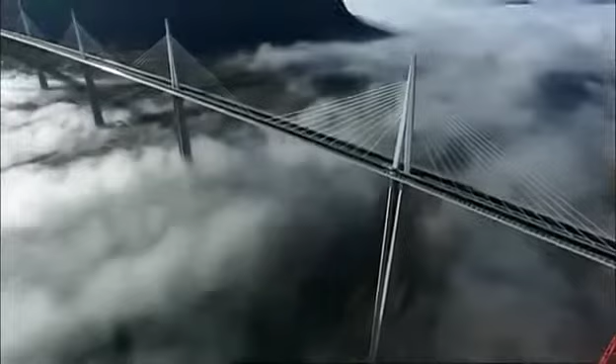This is the Millau Viaduct, the tallest bridge in the world. Its highest tower stretches a staggering 343 meters, so high the bridge glides above the clouds.

But this is a megastructure they said couldn't be built. When I've shown first the drawing of this bridge, they really thought I was crazy.

The team attempting to build this amazing freeway in the sky had to survive landslides, fight winds gusting at 130 kilometers an hour, and weather massive storms as the bridge simply hung in the balance. It's a bridge that pushes the boundaries of engineering to the limits, and then beyond.

Imagine building a series of Eiffel Towers, then slinging a 4-lane highway between them, all the way across one of the deepest valleys in France. Impossible though it sounds, that pretty much describes the building of the Millau Viaduct.

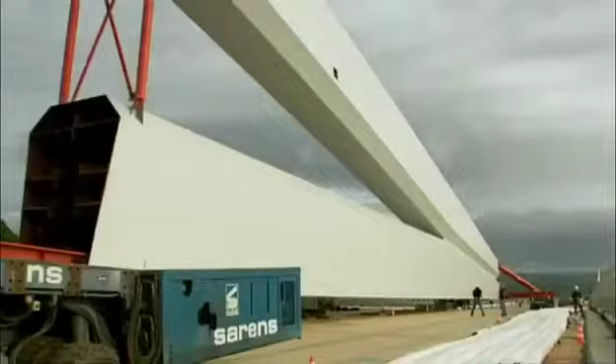From the start, the construction team faced 3 daunting challenges. First, build the tallest bridge piers in the world. Second, put a 36,000-ton freeway on top of them. And third, erect 7 steel pylons, each weighing 700 tons.

And what's more, they had to do this hundreds of meters above solid ground. So high that if you were on top of the Eiffel Tower, you'd still be looking up at this awesome bridge.

October 2001, the team break ground. They're required to build a bridge that'll last for 120 years. And to win the contract, the teams promised to build it in record time, less than 4 years.

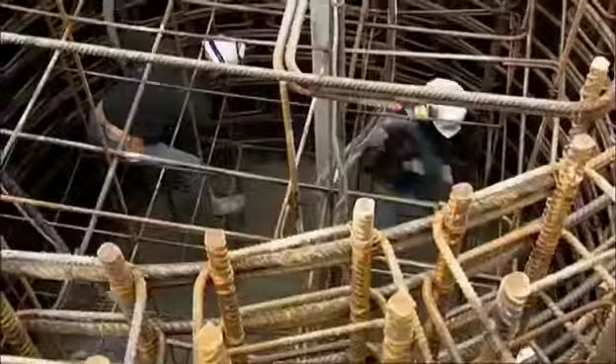By comparison, the world's longest suspension bridge, the Akashi Kaikyo in Japan, took a full 10 years to build. To up the ante, any delay will cost them $30,000 a day in penalties.

There are 7 piers that are numbered from the northern end of the valley. Number 1 will pose problems because of the steep slope. Number 2 will be the biggest challenge since it's the tallest. Crossing the river, number 3 is not much shorter. Then 4, 5, 6, and 7 climb the gentler slope to the south.

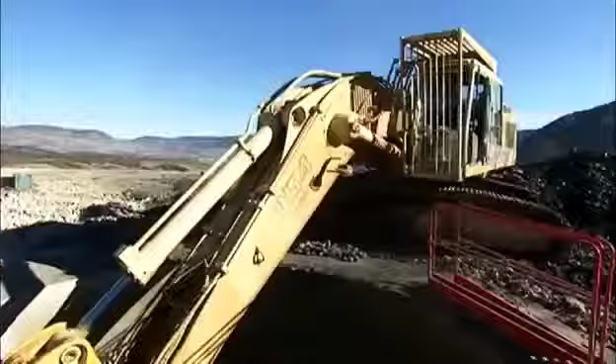To begin, the team had to bury the foundations deep in the bedrock in order to support the enormous weight the bridge will place on them. But the forces of nature were stacked against them.

Geologists have warned of the risks posed by the region's fractured limestone. The rock is full of cavities that are essential to the local cheese economy. These cave systems, close to Millau, are home to a unique bacteria responsible for the blue mold in the world-famous Roquefort cheese. But what's perfect for cheese could be disastrous for a megastructure.

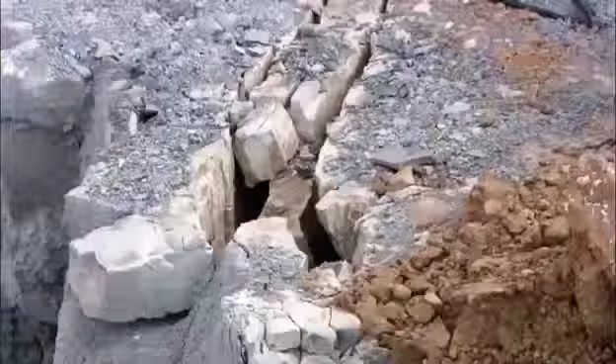The geologist's diagnosis spelt one thing: landslides. This kind of catastrophe could jeopardize the entire project. Despite the warnings, building went ahead as planned.

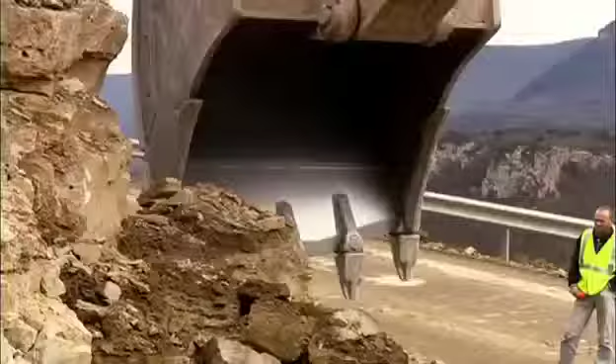Then, well into construction, as predicted, a dramatic storm causes a landslide. 4,000 cubic meters of rock collapse around Pier 1. Fortunately, the fallen rock doesn't damage the pier, but the warning is clear. They're forced to divert precious manpower and equipment to stabilize the slope and prevent a repeat collapse.

So if the area is prone to landslides, why did they build the world's tallest bridge here in the first place? The answer is simple.

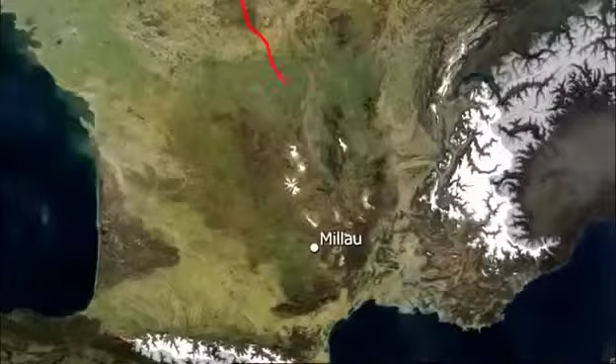In the 1980s, France built a freeway linking Paris directly with Spain. This major artery headed south across the French countryside, while from the Mediterranean, the freeway headed north, until they both hit one of the deepest valleys in France and stopped dead.

Welcome to Millau, France's least favorite bottleneck. The town of Millau is in the mountainous region of the Massif Central, one of the most tranquil parts of France. But in summer, this poor medieval town suffered traffic hell.

The locals couldn't take it anymore. Neither could their mayor. It was terrible for our reputation. When you hear every day on the television and radio, avoid Millau, there's a traffic backup, a 5-hour wait in Millau.

And it's not just the people of Millau. Two drivers, Jamila and Jemima, crossing the 30-odd kilometers between the freeway on either side of Millau, reveal exactly why this bridge is needed. Jamila, in car 33, will cross the new bridge, while in car 22, Jemima will take the old road across the valley floor.

Getting straight on the freeway, car 33 approaches the Millau Bridge after just 18 minutes. The only delay is the 30 seconds it takes to get through the toll booth. Then driving at 100 kilometers an hour over the spectacular bridge, she takes just 32 minutes to get to the other side.

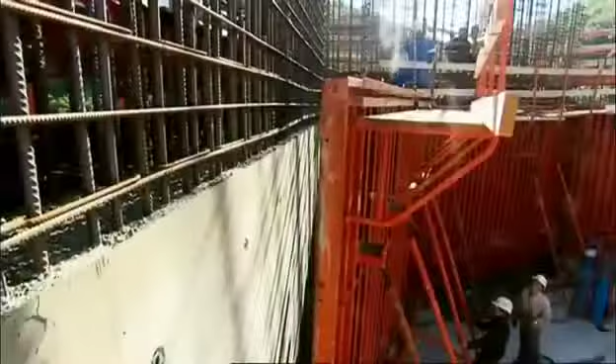The Millau Bridge would not only be the world's tallest, it would be unlike any bridge ever constructed.

When I first showed the drawing of this bridge to the relevant authorities, they really thought I was crazy.

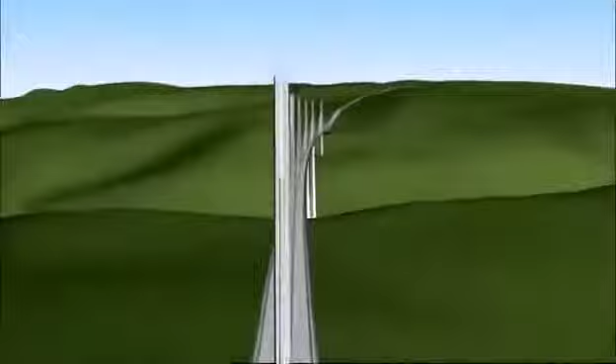Virlogeux's Normandy Bridge has two sets of cables supporting the deck. But he wanted to up the stakes for Millau by losing one row of cables, so the remaining line would be forced to do twice the work. More dramatically, the 2.5-kilometer Millau Bridge, instead of having a single main span, needed a whole series of piers to support it across the valley.

No bridge builders had ever attempted a multiple-span, single-line cable-stay bridge on this scale before. The French authorities had a problem. Nervous about Virlogeux's groundbreaking scheme, they held a competition inviting other engineers and architects to compete with different designs.

The winner, Lord Norman Foster, is one of the world's superstar architects. In Hong Kong, he built the world's largest airport terminal. In Barcelona, offices literally hang from a mast on his communications tower. This is a man who regularly contemplates the impossible and delivers.

You know, it's the challenges, one challenge on top of another, on top of another. And with Millau, one of the biggest challenges was making it fit into the landscape, given it's just down the road from the famous Gorge du Tarn, France's equivalent of the Grand Canyon.

How do you make something which has to be so immensely strong against the forces of nature look very gentle, very delicate? How do you weave something on that scale into the most unbelievable landscape?

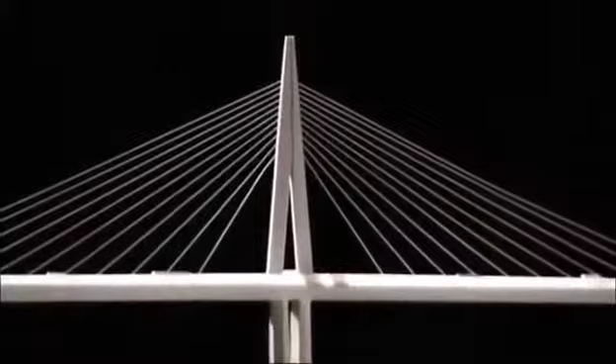Foster wanted the bridge to appear as delicate as a butterfly, but this butterfly has to support the weight of five Eiffel Towers in gale-force winds hundreds of meters above the River Tarn. Getting the design wrong would be a disaster.

Then, with Millau still on the drawing board, Foster's record as a bridge builder suffered a major setback. His Millennium Bridge in London is actually another record-breaking structure, the lowest profile suspension bridge in the world.

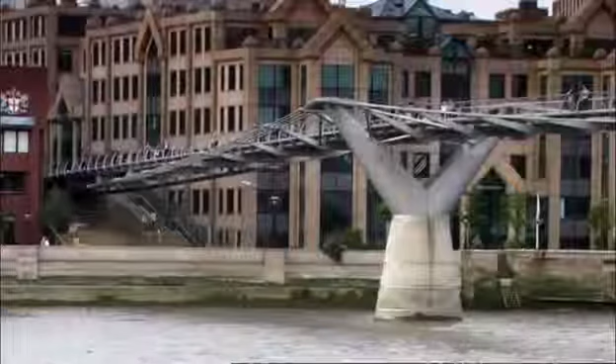But when this footbridge opened to the public in June 2000, it was a public relations disaster. Crowds walking over it set up a resonant frequency, and the bridge began to sway. As people adjusted their step to the small initial wobble, the effect was magnified. Though it didn't threaten the structure, the swinging motion became so dramatic the authorities closed the bridge for a refit that took 1.5 years and ended up costing over $8 million.

It was a bad omen for the Millau Bridge, where construction was soon to begin. And at 15 times the height, a design flaw would be a catastrophe.

December 2001, France's Millau Viaduct, the tallest bridge in the world, is under construction. Everything about this project is supersized. It'll need 200,000 tons of concrete, so much that the team have to build a concrete factory on site. But there's nothing straightforward about this concrete.

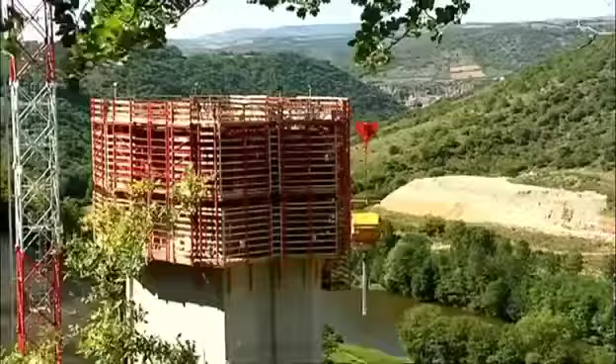The formula must be just right. It needs structural strength to support the massive loads it'll have to bear. But it can't set too quickly, as it has to be hoisted into position and poured hundreds of meters in the air. And it needs to be just the right color to suit Norman Foster's vision.

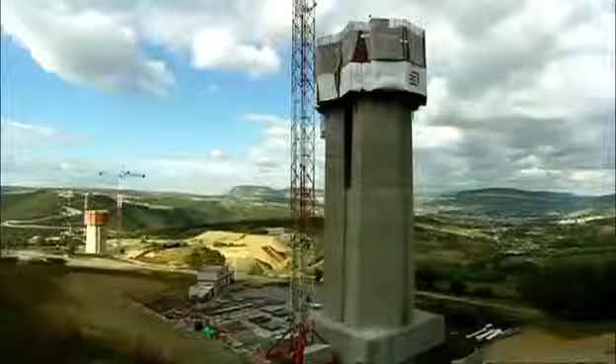In fact, the architect's vision has created a headache for the construction team. He's designed each pier as a complicated geometric shape, tapering the entire way up with vertical grooves set into them to create shadows. But what's just a line on paper for the architect was a major challenge to build.

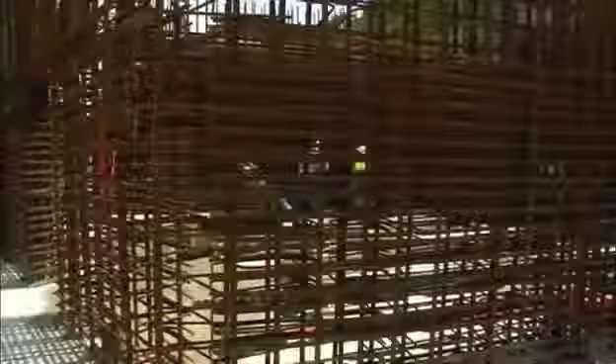The enormous piers are built step by step by pouring concrete into a temporary mold. To give the required strength, the molds are filled with a frame of steel reinforcing bars. In total, 16,000 tons of these steel bars are hoisted into place and secured. Laid end to end, they'd stretch the 4,000 kilometers from Millau all the way to Central Africa.

The shape of each pier is seriously complicated. As a result, each time they remove the sections of red steel shuttering, they have to change the shape of the mold to fit the profile of the next 4-meter section. Manhandling these steel panels, weighing up to 15 tons apiece, is no picnic. And with the combined height of the 7 piers totaling well over 1 kilometer, they have to change the shape of the mold over 250 times.

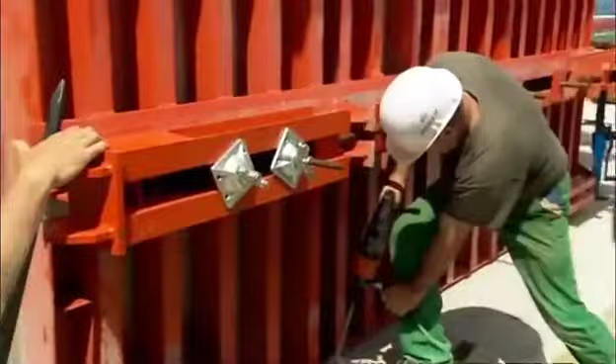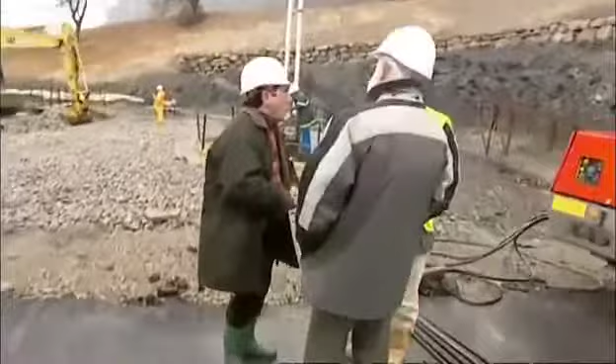Every 3 days, each team on each pier went through this whole cycle, then repeated the process. But it was a race against time, with a permanent threat of delay. Keeping the entire build on time and to budget was the daunting responsibility of one man, Jean-Pierre Martin.

If instead of 3 days we took 4, imagine that multiplied by the number of castings. We'd end up with a 3 or 6 month delay. With a penalty of nearly $1 million a month, this isn't something Martin wanted to contemplate.

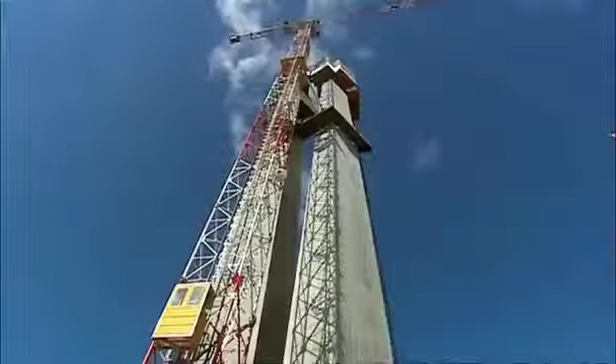And this schedule wasn't his only headache. You have to be pinpoint accurate when you're building the tallest bridge piers in the world. Get it wrong, and the bridge simply won't fit together. Just 10 centimeters out, about a hand's width on each 4-meter section, and the tallest pier could be 6 meters off at the top, the width of a jumbo jet fuselage.

Each team was aiming for a specific point in the sky. For Pier 2, this was exactly 245 meters above the ground, 546 meters from the north side, and 1,914 meters from the southern end. There was no room for error.

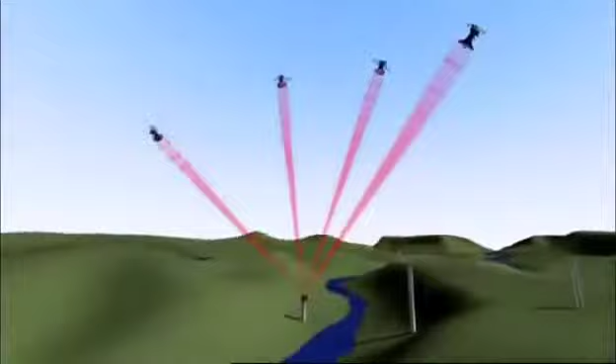The only chance they had to get it right was with GPS, accurate to within 4 millimeters. Using signals from multiple satellites, the team could pinpoint their position and make sure they're on target for that critical point in the sky they needed to hit.

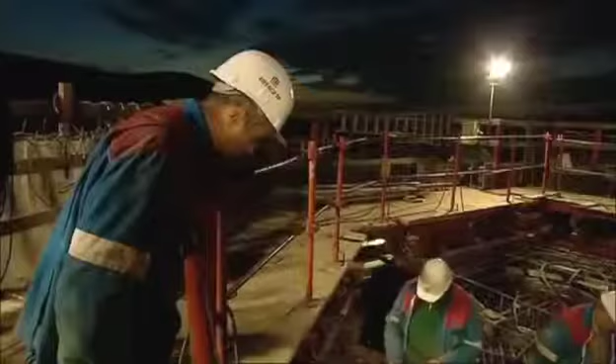Month after month, the piers climbed higher. Finally, by November 2003, they reached their full height. At 245 meters, Pier 2 becomes the highest bridge pier in the world. But is this record-breaking pillar where it's supposed to be? Amazingly, it's dead on target, to within 2 centimeters.

Champagne corks pop. It's time for a major celebration. Against all the odds, they were 1 month ahead of schedule, but the team couldn't afford to relax. The next stage of the project would be the most difficult part of the build.

Phase 2 of building the world's tallest bridge involved putting a 2.5-kilometer roadway weighing 36,000 tons on top of the piers, a full 270 meters above the River Tarn.

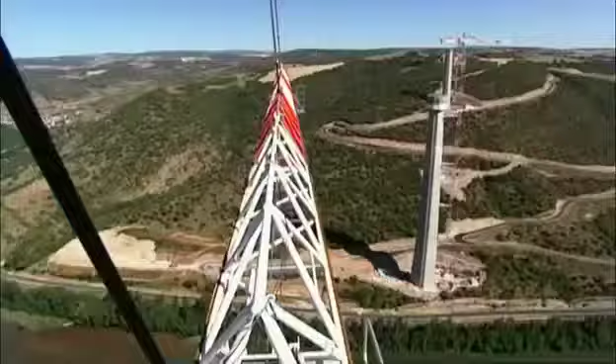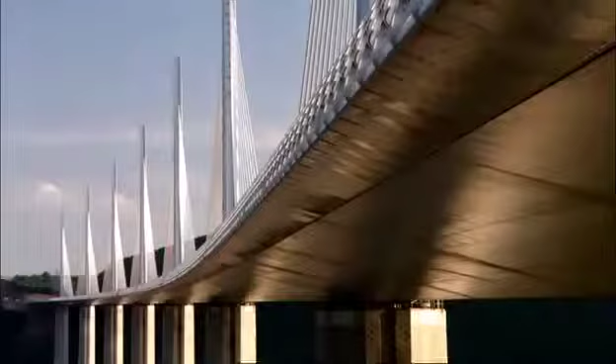With these fatalities in mind, the team decided to fabricate the entire road deck on the safety of solid ground. This meant building it in steel, which in theory would be much safer than lifting vast concrete sections hundreds of meters into position.

There's only one problem with this plan. No one had ever put a road deck on piers anything like this height before, let alone over a 2.5-kilometer span. In the end, only one steel manufacturer had the courage to take on this colossal challenge.

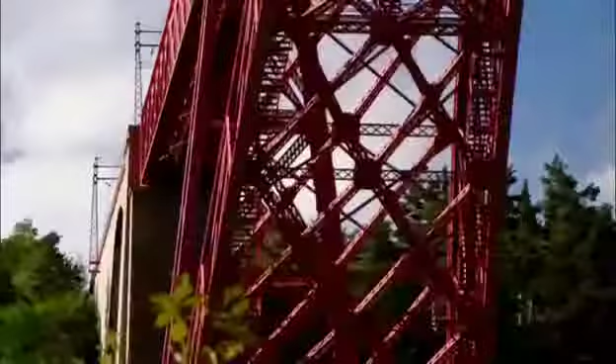Eiffel, the steel firm set up by the great French engineer. Eiffel built what was once the tallest bridge in the world, the Garabit Viaduct in southern France, before getting round to the framing for New York's Statue of Liberty and, of course, his signature tower in Paris.

But despite the company's experience, Eiffel's director, Marc Buonomo, knew he was taking a serious risk. It was a gamble for the company, because if there had been a mistake, if it hadn't worked, it would have been the whole company.

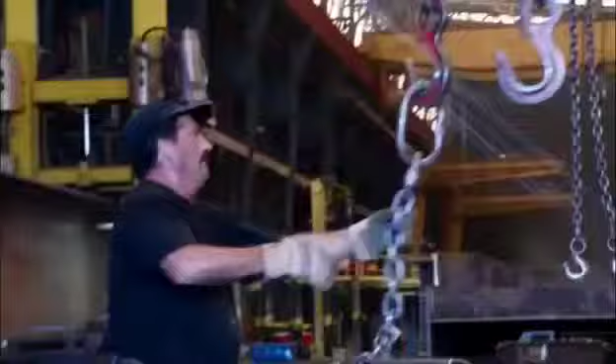They fabricated the massive sections that would make up the road deck in the company's steel factories. This immense jigsaw puzzle involved manufacturing 2,200 separate sections, weighing up to 90 tons, and some of them 22 meters long.

Their accuracy is measured with a laser to within a fraction of a millimeter. The huge square tubes are the central spine that should make the deck rigid. The triangular side panels will be welded on either side to create the width for a 4-lane highway.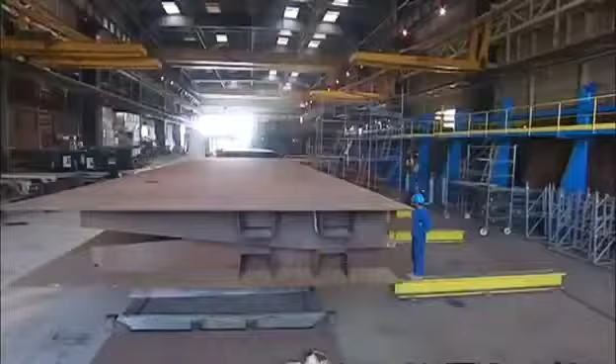To meet the punishing schedule, Buonomo automated the manufacturing with a 2-headed welding robot and a plasma cutting machine. Each cutting pattern or template is programmed into the computer. Then the machine automatically blazes its way through the steel. The torch reaches a scorching 28,000 degrees centigrade, that's 5 times the temperature of the Earth's inner core.

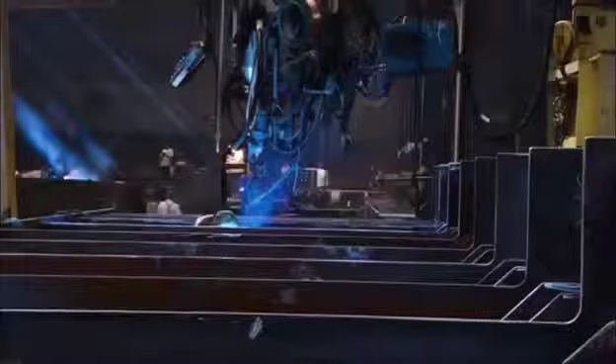But cutting and welding was the easy part. The hard part was getting these monster sections the hundreds of kilometers from the factories to Millau. The routes had to be planned with precision to avoid major damage. The police coordinated safety and clearances.

Even with that level of preparation, some obstacles felt as if they're cutting it just too close for comfort. And this was no one-off event. To build the viaduct took over 2,000 of these extraordinary road convoys.

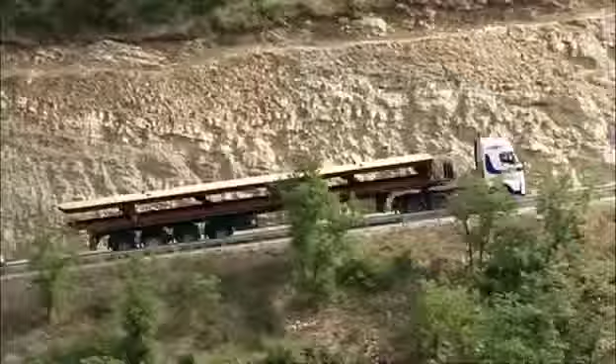The components arrived at assembly plants set up on either side of the valley. Here, the pieces of a massive jigsaw puzzle were welded together to form the two halves of the deck. But getting these two halves to span the valley on top of the world's tallest bridge piers would be a major challenge. They'd be the first team to put a road deck on a pier taller than an 80-story skyscraper.

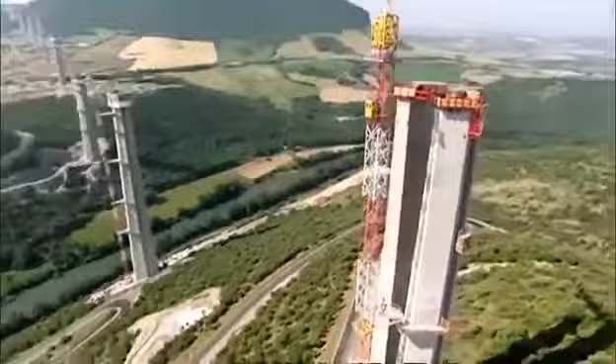Pushing bridge building beyond anything attempted before, they planned to slide the entire 2.5-kilometer road deck over in two colossal pieces. The bridge's chief engineer, Jean-Marie Cremer, was one of the few people who believed it could be done. All the engineers who know this method, who were in the know, didn't believe it was possible. If the team had got their calculations wrong, the entire structure could collapse into the valley.

We found a solution for the construction, which was to launch the bridge from the two sides - one part on the Larzac Plateau, one on the Rouge Plateau - and to push them from the two sides and make them come and meet here above the River Tarn.

Smaller bridges use a similar technique. A powerful set of hydraulic rams literally pumps the deck from one side to the other. But Millau would be the longest launch ever attempted over the highest piers in the world, and the results could spell disaster.

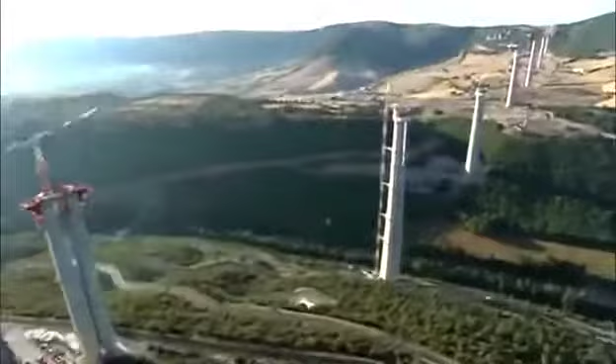The deck is so slender, it would bend and collapse if it were pushed out over the 342-meter spans between each pier. The furthest anyone's previously managed is less than half that distance.

The first part of the solution was simple: fit a pylon so its cables support the front of the deck as it goes out over the valley. Then construct temporary steel support towers that halve the spans to a more manageable 171 meters.

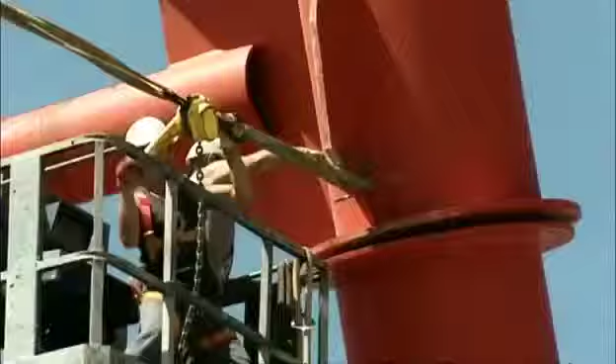These steel towers were a construction feat in themselves. The largest, over 170 meters high, is the tallest ever built, and they needed to carry a massive load - 7,000 tons as the leading edge of the deck, together with the first 90-meter pylon, slide over.

Simply pushing this enormous weight over the top of the vulnerable piers would bring them crashing to the ground. This was the nightmare scenario. If we'd done a conventional launch, we would have knocked the piers over like the pins in a bowling alley.

Someone needed to reinvent the way this type of bridge is built. It's Marc Buonomo with Jean-Marie Cremer who came up with the breakthrough. The basic principle can be demonstrated with a heavy box and a wobbly table.

With a normal launch, you knock over the piers. I want to advance the deck over the pier, but if I push the deck from here, I'd knock over the piers, because they're so tall. The idea is to install a launching system on top of the pier, and that way, if I push the deck, it has no effect on the stability of the piers, and the piers won't fall over.

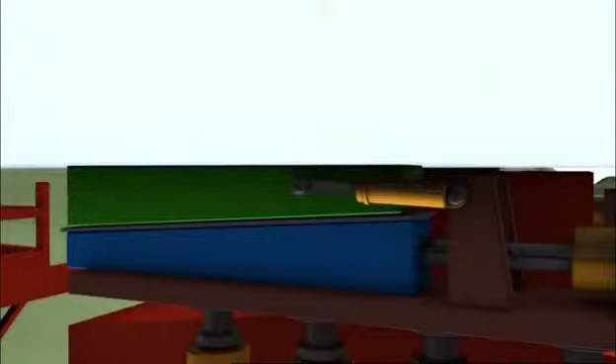The lower wedge then retracts, dropping the deck onto its supports. The upper wedge returns to its original position, and the whole cycle begins again. Four of these clever devices are placed on each pier, all programmed to work at exactly the same time.

The result is that together, they pick up the entire roadway and shunt it forward. But if one fails or gets out of step, it could spell disaster - the force could push the bridge piers apart till they collapse.

When you're up there and you see Millau 300 meters below you, you ask yourself, was this a good idea? The future of the entire project was now hanging on a prototype, and it had never been tested.

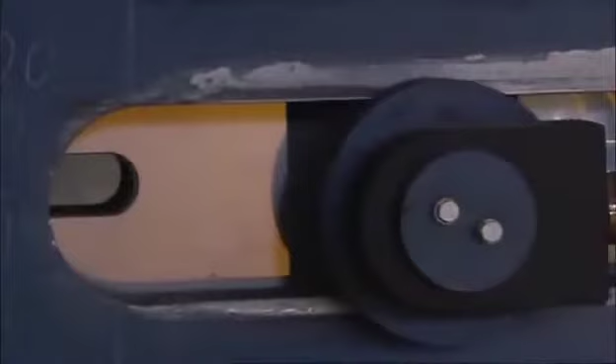It's the morning of February 26, 2003 - do or die day for the world's tallest bridge. Everything is about to be put to the test: the flexibility of the deck, the strength of the temporary piers, and critically, the pioneering hydraulic ram system.

Even Buonamo, the man in charge of the launch, had his doubts. As it had never been done before, I have to tell you, I had fears that it wouldn't work.

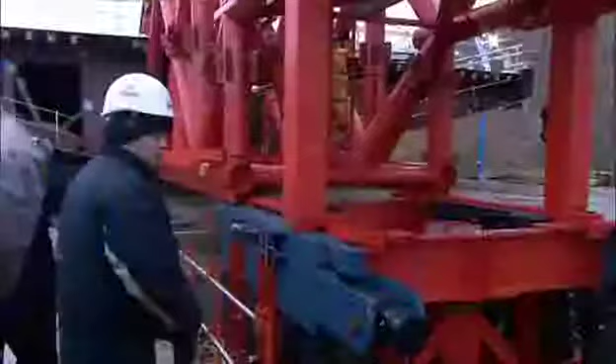The pumps kick in, the pistons start to push, and the deck begins its huge journey across the valley. The moment I heard the motors start, I put my finger on the deck, and I could feel my finger move.

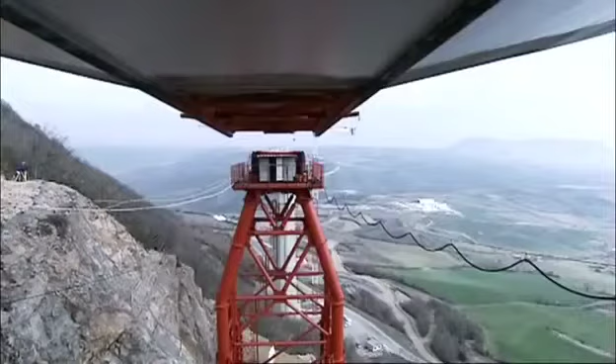Every four minutes, the deck advanced 600 millimeters across the valley. Surveyors tracked its progress, but it was still a nail-biting time as they watched the unsupported deck crossing the void.

Eventually, the deck reached the safety of the first pier. 204 meters down, only 2,256 to go. The launching system seemed to be working as planned, and the engineers were feeling optimistic.

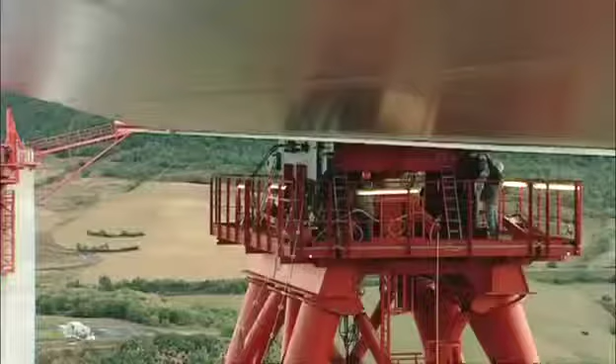But as the deck advances into space, it'll become more vulnerable to the wind, which can reach 130 kilometers an hour. Unfortunately, the road deck has the shape of an upside-down airplane wing, and the team's greatest fear is that this wing could simply take off.

The engineers kept a close eye on the wind and weather conditions. When they were satisfied there was a 3-day weather window and the wind wouldn't exceed 85 kilometers an hour, they'd give the construction team the go-ahead, and the deck launch could continue. The reason for this precaution is simple: strong winds can literally tear a bridge apart.

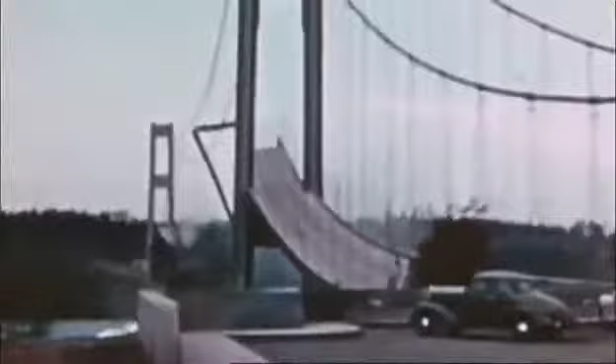In 1940, Washington State built a suspension bridge across the Tacoma Narrows in the US Northwest. It opened with a grand ceremony on July the 1st. But the celebrations were short-lived. The bridge had a major problem: the wind.

Girders beneath the deck, designed to make the bridge rigid, actually blocked the wind, causing the roadway to ripple alarmingly. Locals soon dubbed it Galloping Gertie.

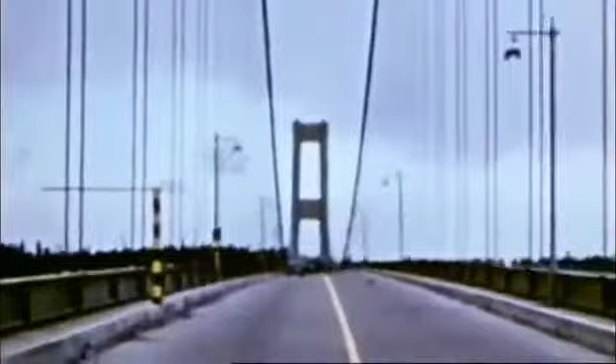On the 7th of November, with the wind less than 70 kilometers an hour, the bridge begins to twist violently. At 11 a.m., time runs out for Galloping Gertie. The wind sends the bridge crashing into the river.

Wind tunnel testing is now standard procedure as a direct result of Galloping Gertie. For the Millau Bridge, they analyzed the wind in the Tarn Valley over 18 months, then recreated those conditions in the wind tunnel. Wind engineer Olivier Flamand was shocked by the results. The average wind speed was relatively low, but because there's such strong turbulence, it created very fast peak winds.

The rugged terrain creates serious turbulence at the height of the road deck. Winds peak at 130 kilometers per hour. That's hurricane force. They tested every aspect of the bridge to analyze the risks: piers, pylons, and critically the deck.

But it's not just the aerodynamics of the finished bridge. They needed to find out how it would behave when it was most at risk, during the launching of the deck.

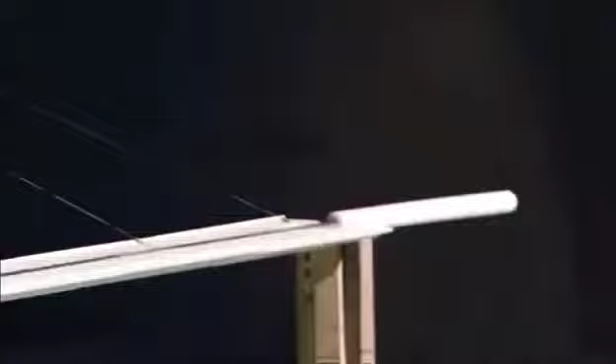Olivier and his team reached a chilling conclusion. The winds they've measured are strong enough to blow the unsecured deck off its supports and send it crashing hundreds of feet to the valley floor.

And then the nightmare began. On the 22nd of August 2003, 6 months into the deck launch, one of the launch systems failed, leaving the deck hanging in the wind. To make matters worse, the weathermen were predicting storms.

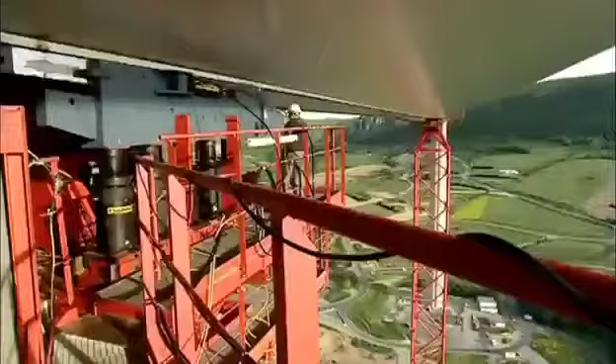So far, these massive pumping machines had worked perfectly. But the fact is they were prototypes, and due to the frantic schedule, they'd never been tested.

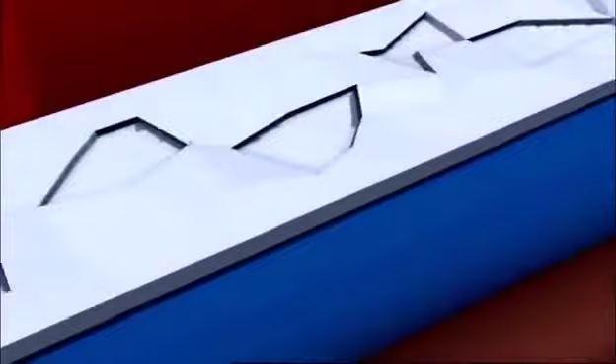The problem was that the non-stick Teflon between the sliding surfaces had ripped, and the friction generated was too much for the hydraulic rams to push against. Unfortunately, no one had planned on replacing parts of this monster machine mid-launch on top of a massive concrete pillar. This was very bad news for the man who staked his reputation on this system.

It was maximum stress, like poison in your mouth. You don't forget that.

Re-examining their calculations, they realized the cause of the problem. They'd underestimated the forces between sliding surfaces, but they wouldn't be able to repair it without the necessary spare parts. The clock was ticking, and Marc Buonomo needed a solution fast.

When Apollo 13 came back with that incident, the NASA engineers requested they did the inventory of everything there was on board to know how to fix it.

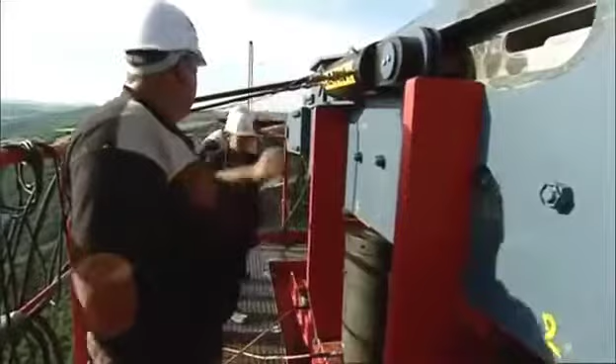The Millau team did an inventory. They realized that the other launching machines, not yet being used, could be stripped to provide the new Teflon surfaces they needed. Working all through the night, the team extended the access platform, allowing them to take out the 5-meter-long, 2-ton steel wedges, replace the Teflon, and reassemble the launching machine. By 8 a.m. the next morning, it was ready to resume the launch.

The rest of the week, the predicted storms arrived, and another set of launching machines wore out. So when the deck finally made it to the safety of the next pier, the team breathed a major sigh of relief.

You don't forget that. I won't forget that for 4 hours I was really scared.

The two decks continued their journey across the valley. Day after day, week after week for a full 14 months, they approached each other, millimeter by millimeter.

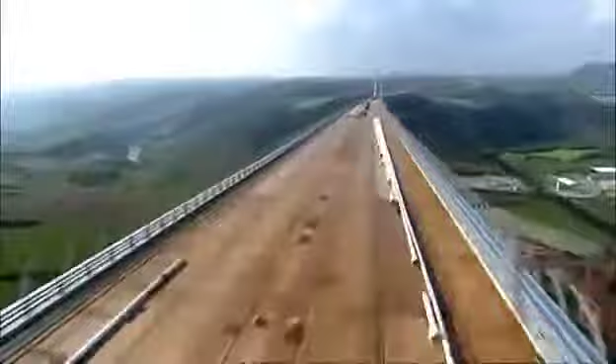By May 2004, they'd reached a critical phase. From the northern end, the shorter deck had traveled 717 meters into space to reach its final resting place. From the south, the longer deck extended over 1.5 kilometers. Only the section over the river, the one point where it was impossible to erect a temporary pier, divided them.

But would they meet as planned? If they've got their calculations wrong, they'll have built the biggest white elephant in Europe.

Even the man behind the whole project had his doubts. I was not convinced at all that the two parts of the deck could meet exactly with a perfect geometry.

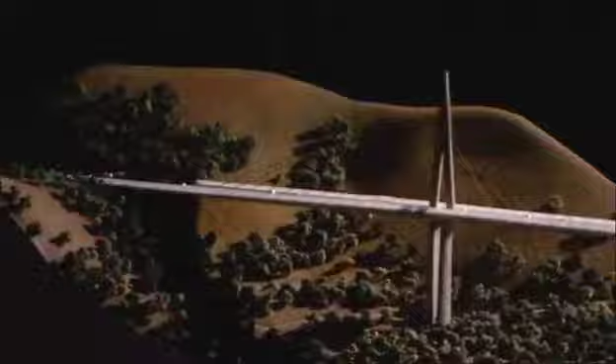The odds were against them. Calculating such a feat so precisely is a Herculean task. Firstly, the two starting points on the northern and southern slopes of the valley are at different heights. Secondly, the bridge has a subtle curve to it. As a result, each steel panel which makes up the road deck had to be cut and welded with extreme precision. It would be an engineering triumph if they got these two sloping curved decks to meet as required.

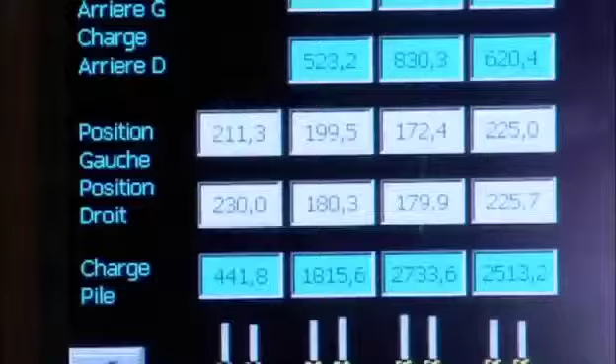The team checked the weather reports. With the wind inside safety limits, they gave the go-ahead for the final push. The rams began to drive the deck's leading edge off the safety of Pier 3 towards its destination. At this point, a total of 21 launching systems needed to move at exactly the same moment to avoid disaster.

If anything were to go wrong now, the man responsible would be Marc Buonomo. Everyone asked me, how can you be sure that it will go straight? So to be sure that they were going to the right place, I had a GPS put on the front, so I could see the gap between the theoretical and the real position.

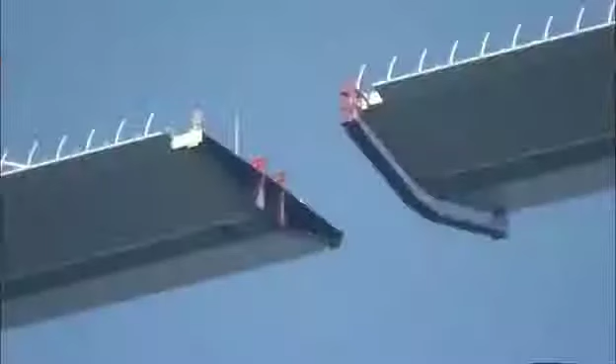Over the next 2 days and nights, the deck advances 600 millimeters at a time towards its final resting place. The world's media are watching the critical meeting of the decks. And to add to the pressure, the French Prime Minister is due to drop in to celebrate the event.

The deck pushes forward, now with only centimeters separating the two sections. A magnum of champagne is hung between them to mark the moment.

At last, union. The two massive steel decks have traveled high over this valley, a total of 2.5 kilometers, and when they check, they're aligned to within 1 centimeter. That's accurate to within 99.9999%. All the measuring, all the calculations have paid off. They've nailed it.

The meeting of the decks was a special moment. News reports traveled round the world, and in Salzburg, Austria, they reached Felix Baumgartner, aka Felix the Conqueror.

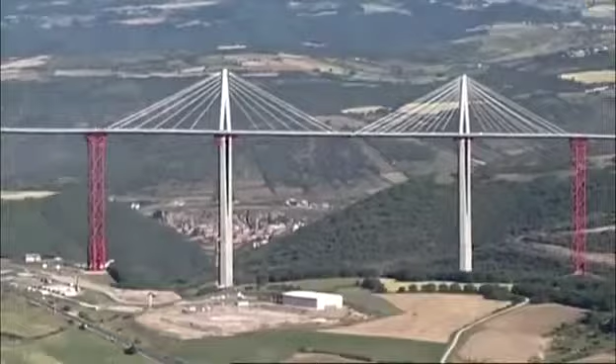Baumgartner waited for darkness before arriving on site. He found his way to the base of Pier 2, then climbed an access ladder the full 245 meters to the top. He entered the steel road deck and found a place to hide until daybreak. He had to remain concealed until the sun was high enough for his cameramen to record his world record attempt.

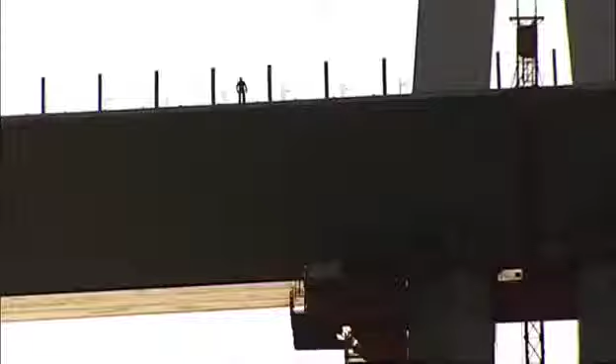At 7 a.m. the following morning, Felix the Conqueror emerged. He took a cool backward flip off the tallest bridge in the world and entered the record books.

The tallest bridge in the world, 250 meters. I did it. And having evaded death, he made sure he's not caught by the police.

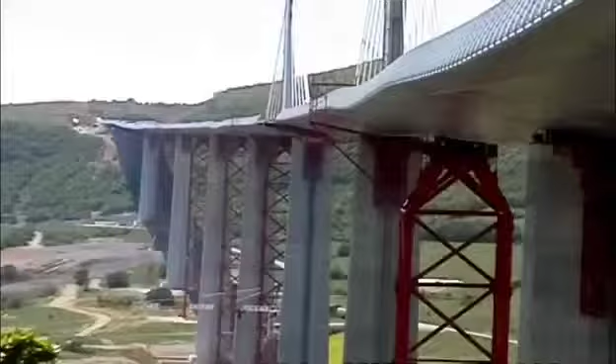The decks have been joined, and the team have reached the final phase of the project. But there was still a race to meet the schedule, and their problems weren't over yet. Everyone could see the dramatic undulations in the flexible steel deck. Even some hardened bridge builders wondered about its structural integrity.

It was a huge surprise for everyone. All the engineers said, we knew steel was flexible, but not that flexible. The team were relying on the pylons and cables to pull the deck straight. Each massive pylon is 90 meters high and weighs 700 tons, the equivalent of 85 London buses. Placing them in position on the slender deck, high above the valley floor, would go beyond anything ever attempted.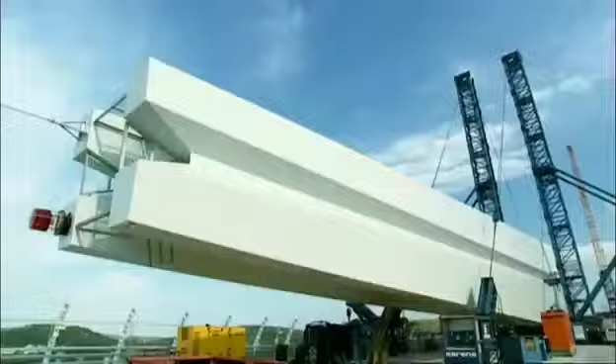Once again, Marc Buonomo had a plan. You know, the first people to make vertical pylons were the Egyptians. Buonomo adapted a technique used in ancient Egypt to erect obelisks in the sands.

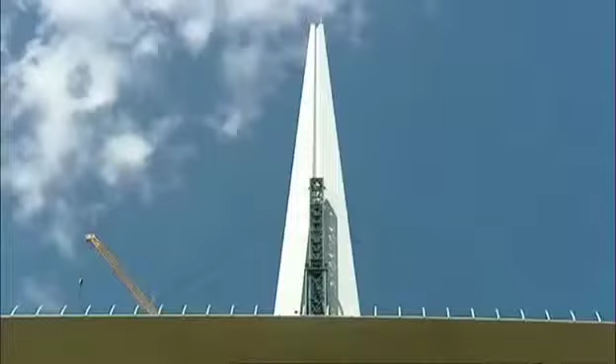On top of the road deck, the team put up two enormous steel towers, both of them secured by cables and equipped with a hydraulic system capable of raising 1,000 tons. The 700-ton pylon is then lifted by the hydraulics. As it rises, it pivots little by little until it's vertical. It's then lowered safely onto its anchorage point. Buonomo's 4,000-year-old technique worked to perfection.

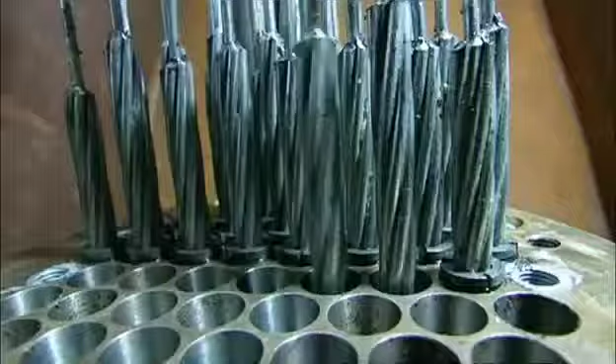With all 7 pylons in place, the team could attach the cable stays that would straighten the rippling deck and give it the strength to cope with full traffic loads, they hoped. The weight of the roadway is now over 40,000 tons, the equivalent of a cruise ship, and the 154 cable stays should prevent it from sagging or collapsing. The strongest stays are made up of 91 individual steel strands and have a breaking strength of 25,000 tons, strong enough to hold back 25 jumbo jets, all at full throttle.

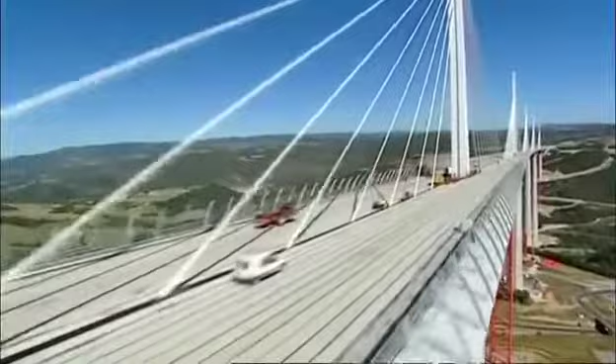As the cable stays are tensioned, true to plan, the ripples in the road deck are pulled straight. Over the 2.5-kilometer deck, the ripples are now no larger than the size of a thumb. They're finally on the home straight. The road surface goes on, adding a further 10,000 tons to the load. That's like driving 153 battle tanks onto the deck.

But before it could open to the public, the team needed to know the bridge is safe. It would have to pass one crucial test.

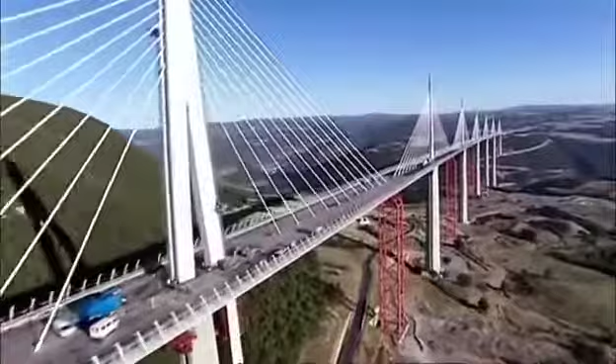After 3 years, the construction team building France's Millau Viaduct, the world's tallest bridge, are about to find out if they got their calculations right.

On a single-span cable-stay bridge like the Normandy Bridge, a large load on the main section is no problem because the cables are attached to solid ground and can't give. On the Millau Viaduct, with its 8 spans, the cables are attached to the deck of the adjacent sections. A load on one section will cause it to drop, pulling the stays down. As the pylons lean in, the matching stays are pulled upwards, lifting the neighboring decks and causing a dangerous rippling effect.

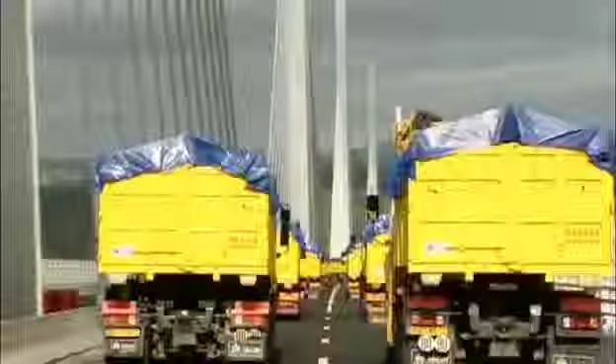Now the team put their bridge to the test. These 28 trucks have a combined weight of over 900 tons. They are positioned at the critical point, mid-span. The engineers hold their breath. Measurements are taken: the span bends just 26 centimeters. This is a triumph for the engineers - the bridge was designed to cope with more than double that.

4 weeks later, on December the 14th, 2004, President Jacques Chirac officially opened the Millau Bridge. A proud moment for the whole of France.

Just over 3 years of construction have produced the tallest bridge in the world, designed to last at least 120 years. And against the odds, the project manager even brought the job in on time. But that's not what he's most proud about.

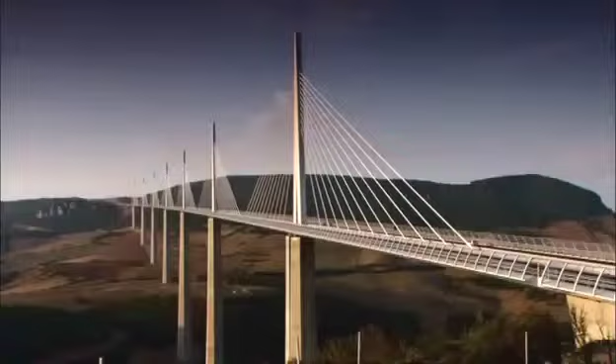What I remember, because on construction sites there are often accidents, is that we had no serious accidents - nothing more than a minor injury.

As soon as it opened to the public, the bridge was an instant success. But the real test isn't till its first summer, when the French all take their annual vacation. No one ever expected anything like this - numbers peaked at more than 50,000 vehicles a day. At over $7 per car, that's great news for the construction company, who are clawing back their $478 million investment in the project.

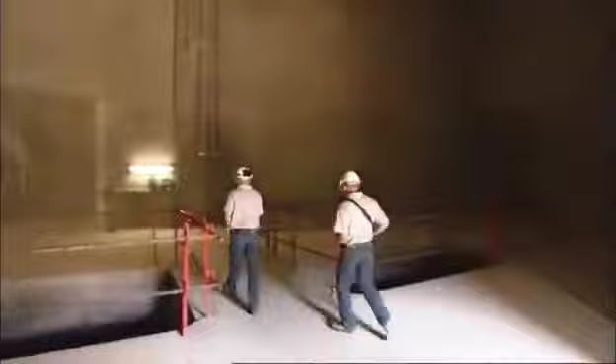This was an epic bridge to build, but it's just as epic to maintain. Thierry and Frank are assigned to P2, the world's tallest bridge pier. This structure is no solid concrete block - it's a series of vast hollow spaces. Their job today is to test the communication system and electric circuits on each of the 7 structural floors.

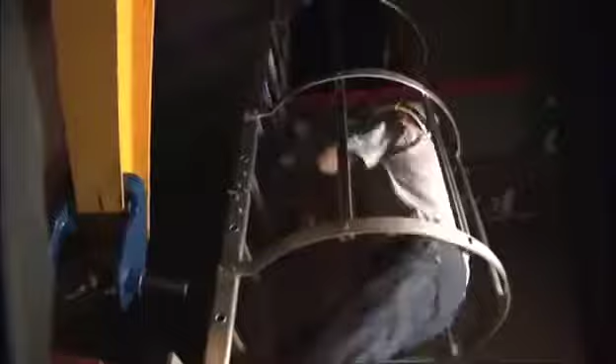This involves a 343-meter climb, going hand over hand up a ladder for the rest of the day. By dusk, when Thierry finally reaches the summit of the pylon, he may be exhausted, but there is a payoff: you get a fantastic view from here, a 360-degree panorama.

The tallest bridge in the world has become an icon. But this is creating problems no one had ever imagined. Locals have been taking over the bridge as a platform to get media attention for their causes. This crowd was hoping that driving sheep over this freeway in the sky would help them get more farming subsidies.

Jose's job is to prevent this kind of incident from creating a danger, and on this bridge, the incidents keep on happening. An alarm triggered by a motion detection system means there's a stopped vehicle on the bridge. Immediately, Jose dispatches a colleague to deal with the situation.

The last thing anyone wants is a multi-car pile-up on a 2.5-kilometer bridge, a quarter of a kilometer in the sky. Jose zooms in his camera to reveal the man has left his car and is sitting dangerously on the crash barrier. The driver's probably only broken down, but already one man who stopped climbed over the wind barrier and jumped to his death.

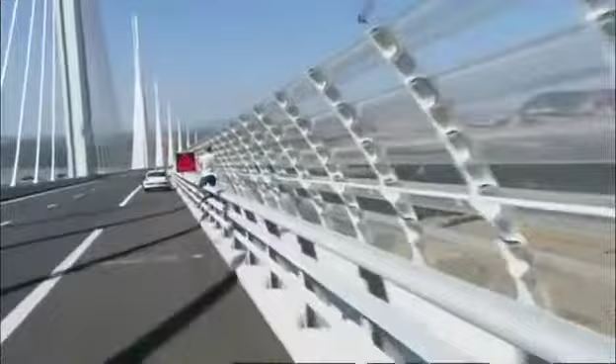Bruno intervenes. Thankfully, it's no more than an irresponsible photographer who's sent on his way.

You could say the Millau Bridge is a victim of its own success. It's definitely become a major tourist destination - 700,000 visitors in the first 9 months. Fortunately, most of them wait till they're off the bridge to take their photos.

It's magnificent. I came 600 kilometers today to see the Millau Viaduct. There's only one thing to say: it's extraordinary. They're drawn because it's a world-beating structure, but also because it's incredibly beautiful, delicate, and minimal.

Not what you'd expect from a structure that's nearly a third taller than any other bridge on the planet. And architect Lord Norman Foster achieved his aim to give the driver the sensation of soaring.

As you leave these plateaus, you do fly - you fly across this bridge. Literally, you are above the clouds.

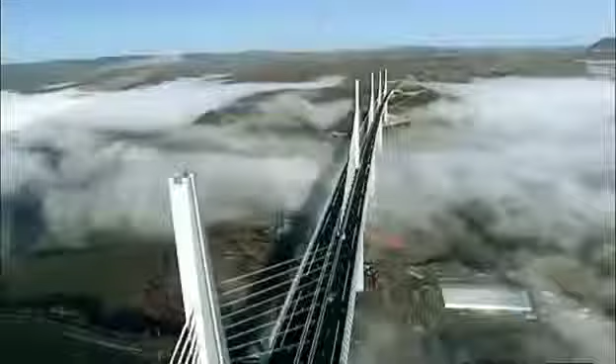And the result certainly pleases the man who dreamt it all up. To see erected this bridge, which I imagined 15 years ago, it's something magic.

This is the longest pure cable-stay bridge in the world, the tallest roadway in the world, and of course, at 343 meters, it is the tallest bridge ever constructed.